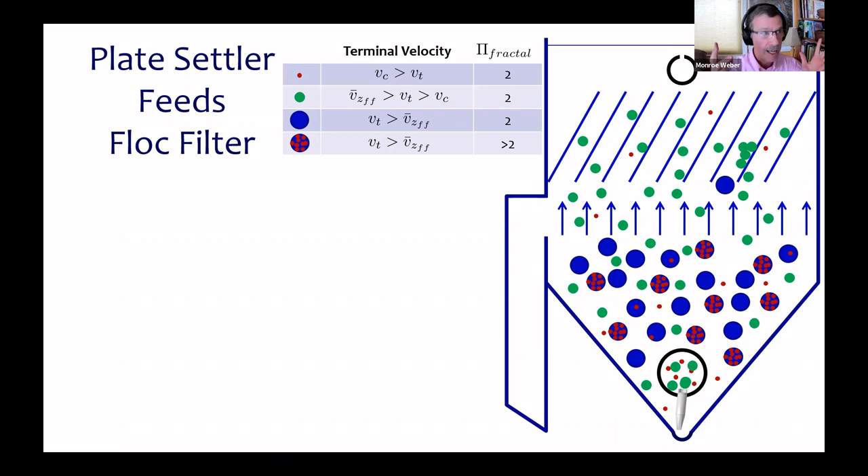And as it does that, it becomes more dense, its fractal dimension increases, its porosity decreases, and so very little flow of water goes through it anymore, and hence it's not able to capture any more red particles, and so it ends up being useless. And we're going to go to this system where we actually make a little tiny tank representing this inside the lab, and we're going to look at what happens inside that system.

And we did this because there were things that we ran into in the field, in the water treatment plants in the field, where it didn't work the way we expected it to. And the thing that actually wasn't working right is we weren't succeeding in getting floc filters in the plants in Honduras, even though in the lab, we could make a floc filter in an hour. And we couldn't figure out what we were doing wrong with the geometry, that in the lab it worked and in the field it didn't.

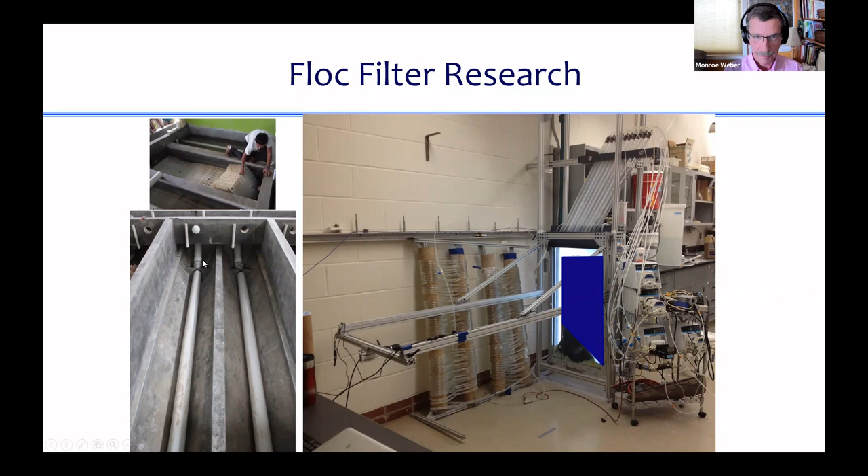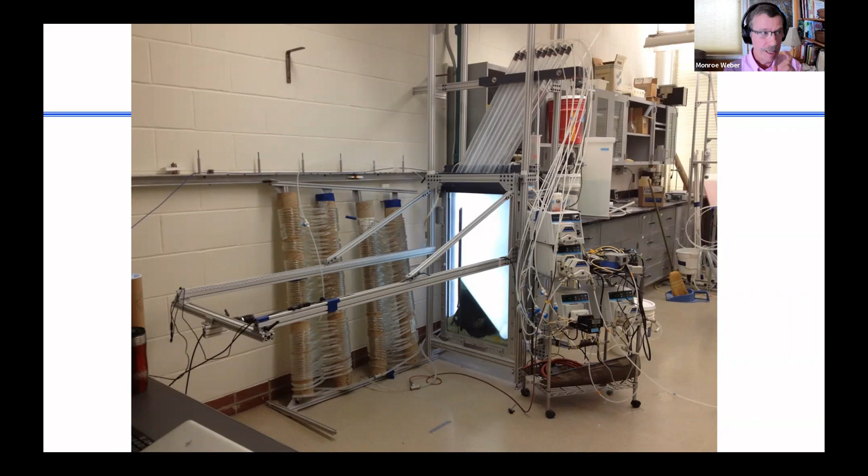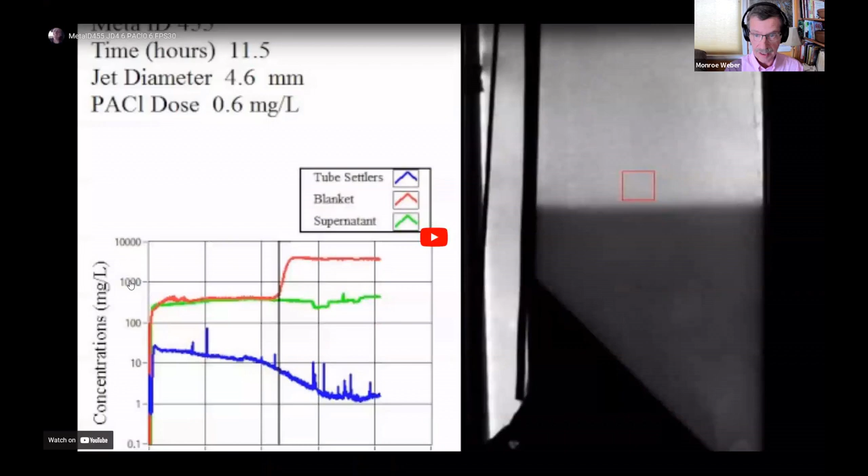So we built this system, and we're going to jump ahead to look at what happens when it's working, and then we'll come back to what was the geometry that was messing us up and was making it not work initially. So first, what happens when it's working? So we're going to look at this, and we just started this the last time. And so I intend to play through this a couple of times.

You could think about, why does the green graph stay relatively constant? The green graph is looking at the concentration of solids in the green rectangle at the very top of this system. The red one is from the red rectangle, and look at the red one. Right there it crosses, and you can see that the red line went up really, really fast as the suspension crossed that red box. Does that make sense? We're looking in the red box and we're figuring out what the concentration is. Okay, so that was one. Let's do it again.

You can see that there are things settling out on the incline. There is some interesting behavior on the incline that I don't actually understand. And maybe it's a little bit dark, but you can, wow, you can see that it looks like there'd be some interesting things happening at the very bottom of this. And you see that it grows quickly. Granted, the time is sped up a lot. We're at 14 hours right now, 15 hours, 16 hours.

And you see the floc hopper kick into action right there. It's going to kick into action, and you can actually see the floc hopper filling up. Should we do that one more time?

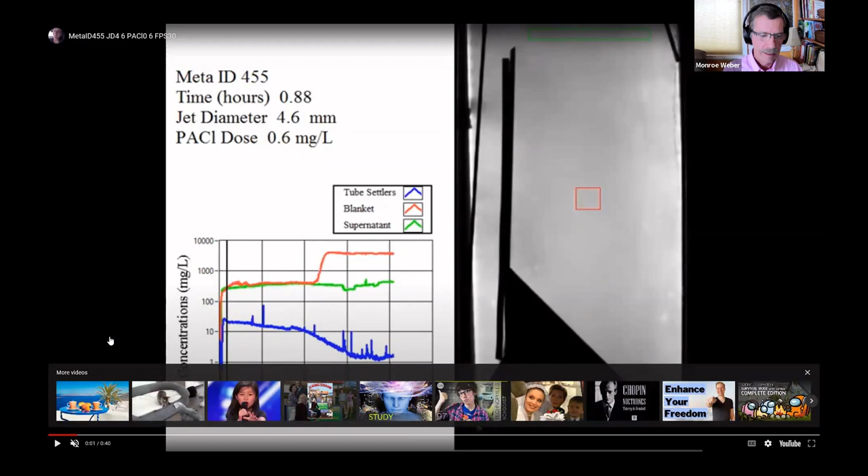So notice that the blue line, which is the turbidity coming out of the tube settlers that are at the top of this, once the floc filter starts forming, those numbers start dropping. And so the blue line is dropping here. And that is because the floc filters are successfully capturing particles that otherwise would have gone right through the plate settlers.

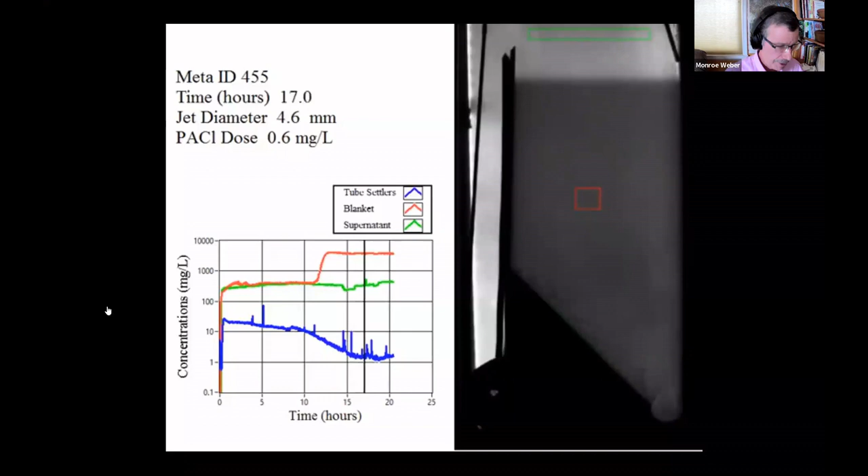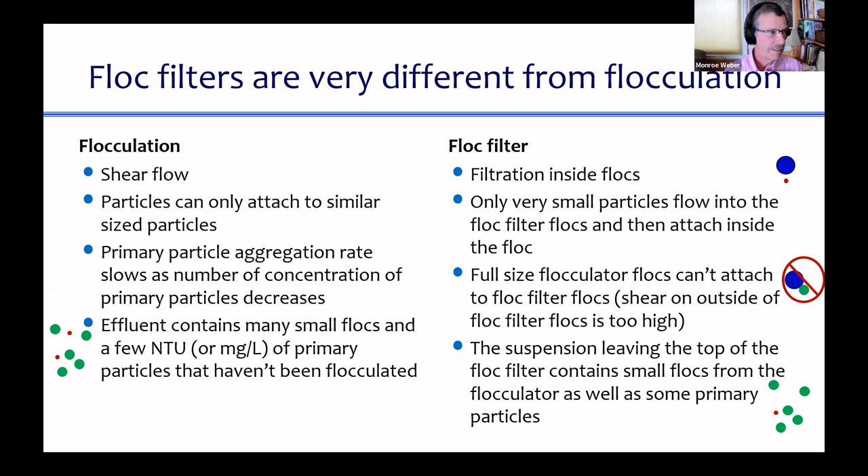I'd just be happy to take any. Okay, I think I'm going to let you read that slide at your leisure because you don't like it when I read text, I'm guessing. So we'll go to the next one.

So let's think about this for a second. What happens if we have a system that's up and working, and then what happens if I slow the flow rate down? So real plants don't always operate at the design flow rate. Matter of fact, they often don't operate at the design flow rate. And so if they don't need as much water, they operate slower. And then the question is, well, what happens inside this system if the flow rate is slower?

So could you think for a second about what do you think would change if the flow rate through this system slows down? Oh man, that's hard. I should have asked this question later after we saw more videos. Maybe I'll come back to this. Unless someone wants to jump in with an idea, what you think might happen when you slow this down. Oh, and it's also good to try Monroe's idea of just go to extremes. What if you slow it down a lot? Then what's going to happen? Maybe you will see it.

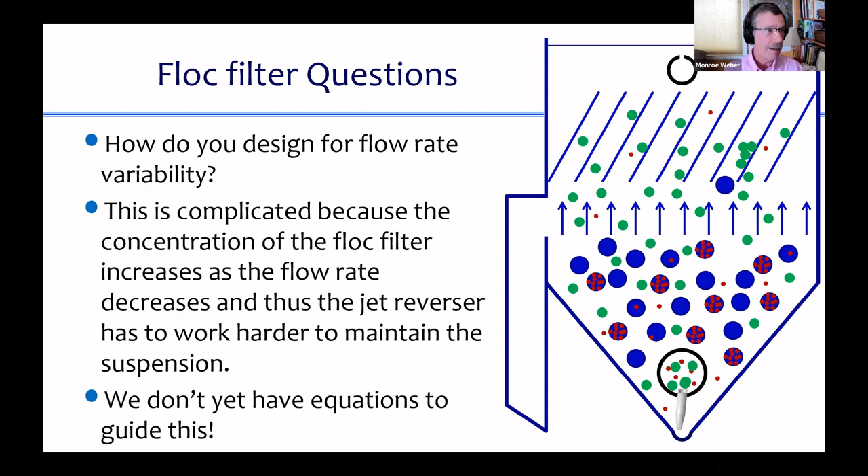So there's a failure mode, and we have to think about what are we going to do about that. There is one nice option that we have inside an AguaClara plant, and this would be not unique to us, but you should be able to turn off. You'll have multiple sedimentation tank systems in parallel, and you could always take one or more out of service so that the other ones keep on running at a reasonable rate. So that's one way to get around that problem. But I note here that we don't have the equations to describe this yet. So there's more work to be done.

And here's another one. The operator would like to know what's going on both inside the floc hopper and also being able to see what's happening inside the floc filter. And you're looking at it from up above, and you could conceivably, and actually operators do this, if you shine a flashlight down between plate settlers, you can actually see down to the top of the floc filter. So that's one way that you can kind of tell what's going on. But it's awkward because this system is kind of buried in concrete underneath the plate settlers, and so you can't see it very well.

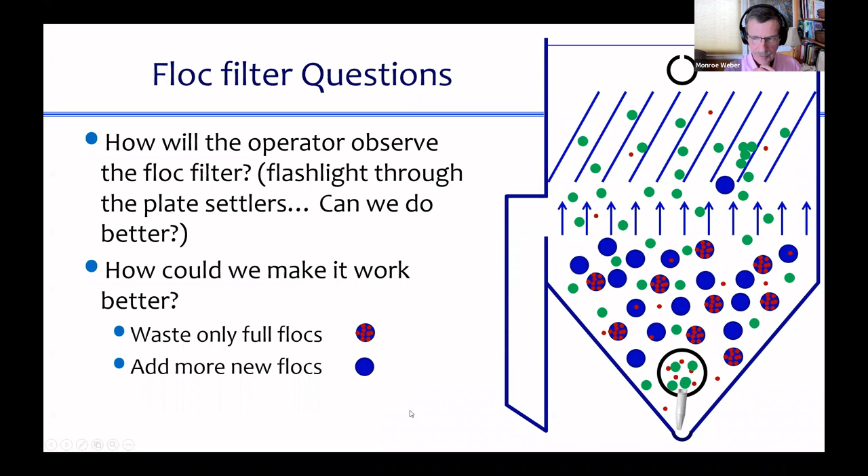Okay, so now we're going to talk about what we discovered about this jet reverser system that's at the very bottom. So this jet reverser is the key to make this whole system work. And it was invented in the labs at Cornell with that apparatus that I showed you by playing with various designs and seeing what went wrong.

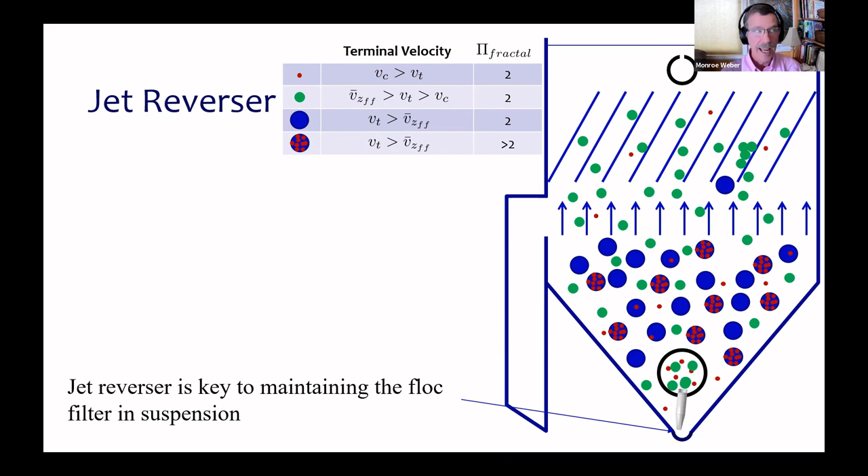So this is our current design. There's a little 3-inch pipe at the bottom, very bottom of the tank in the middle. And the diffusers, the pipes that are bringing the water in from the flocculator, are shooting down into that half pipe. And that's what's causing the flocs to be resuspended.

So here's a few videos for fun. The video on the left is we're testing out the design that we were actually building in Honduras. And the design in Honduras had a flat bottom with a diffuser just blasting flocculated water onto that flat bottom. And you see that it's not succeeding in making a floc filter. And there's a huge contrast with the one on the right, where it grows very quickly. And the one on the right has the jet reverser installed.

So it's interesting looking at the one on the left, and look at what's happening right now. There's sediment accumulating in the bottom of the tank, and it's slowly working its way in. And it's almost like that sediment is knocking on us and saying, look, if you made a little round thing down here, it would work. See that? Like the sediment is actually making the form that it needs to be in order for it to work. The problem with the sediment is that it's not stable.

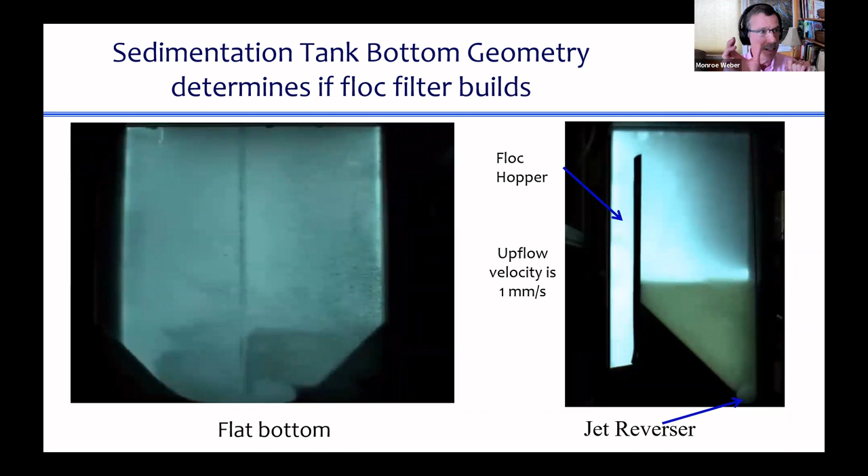And so it keeps on eating away and then coming back. And so that system never works. And that explains why the plants that we built in Honduras that had flat bottoms didn't work. And so there was this great insight. You need a jet reverser in the bottom, where you're very much controlling which direction the water takes that you're injecting into the bottom of the tank.

Here's some more videos of the same kind of problem. So flat bottom, centered and offset. And I have a colleague, Len Lion, that I worked with for many, many years, and good friend. And we would be advising students, and we would essentially take bets, although there was no money involved, about which system would be better. And then the students would do the experiment, and then unfortunately, one of us would be proven wrong and one of us would be right.

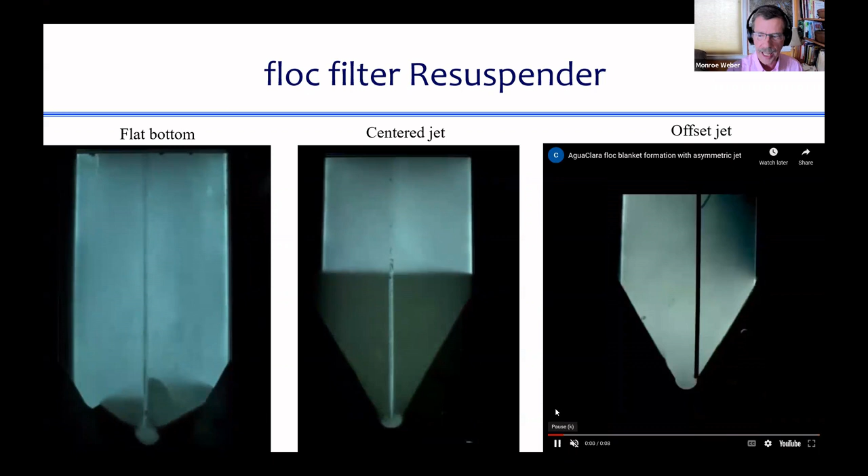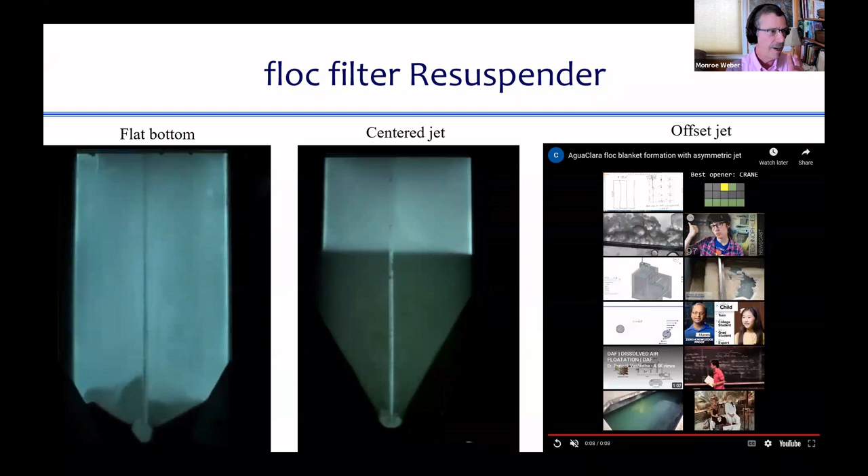And I felt like the world is beautiful, physics is beautiful, there are beautiful equations, axisymmetric is beautiful. So the best design here will be an axisymmetric system with a centered jet. And Len Lion thinks it's going to be non-symmetric, that it's going to be better with the inlet off to the side. And guess what? He was so right. Off to the side, it's completely stable. It forms a floc blanket very, very quickly. And there's never any failure that shows up right at the bottom of this tank.

Whereas when you're injecting dead center, that jet, with relatively little force exerted on it, can decide to go more into one direction than in the other direction. And what happens is sediment can accumulate on the one side more, and that will push the jet away from that sediment. And because that jet can be easily deflected, it's not always stable.

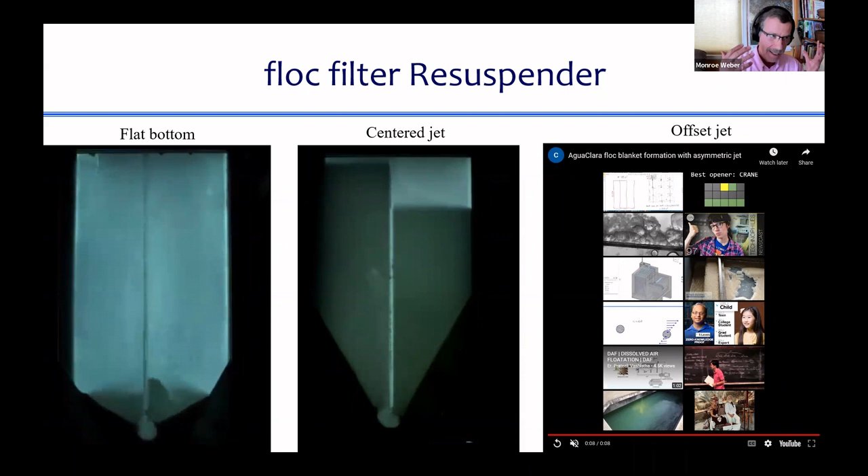And you can see that in the video right now, you see that the jet is kind of going more towards the left and less towards the right, because the sediment is coming in further on the right side. So it's better to not give the jet a choice and to put it in on the one side of the jet reverser, so that its only choice is to go around like this.

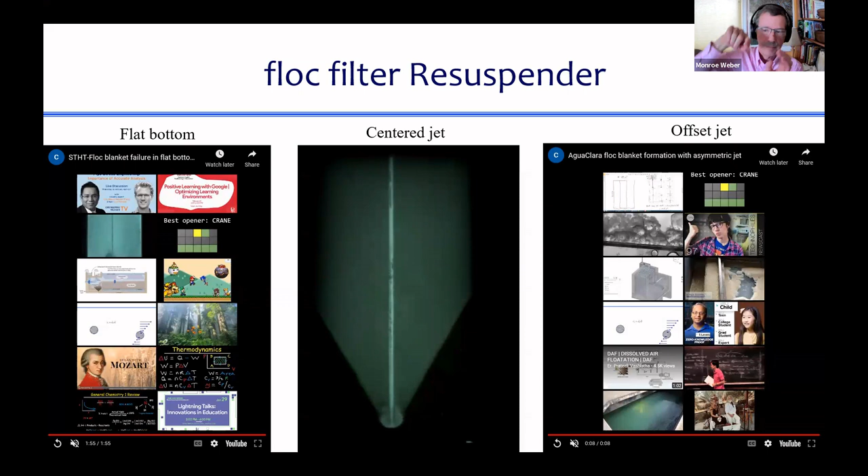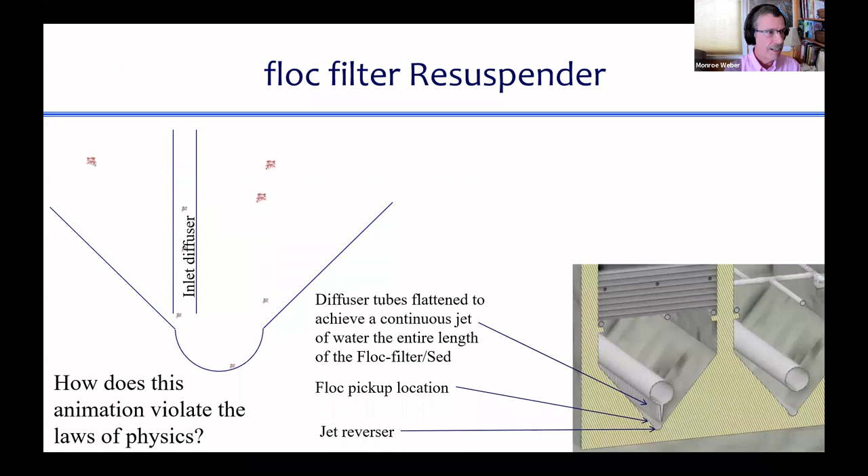And then they slide into where the jet is coming up. So the jet comes around the bottom here, comes up right here. And so it resuspends any flocs that are sliding down that incline. And then at this point, you should be asking, well, what about the other side of the tank? There's another incline. What do those flocs do? So we'll turn that on. So the floc on the other side goes down the incline, slides around, and gets carried the whole way around the jet reverser.